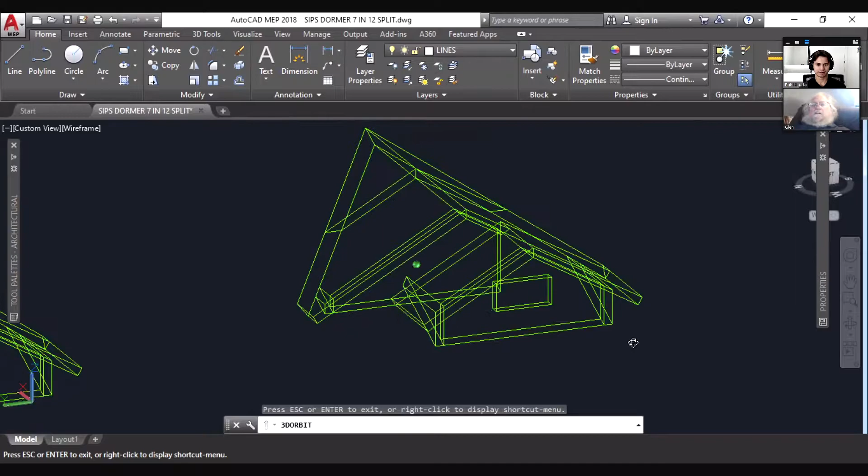Yeah, I like the split dormer. This one's interesting, and it's all done with SIPS panels. There's only 11 pieces to it.

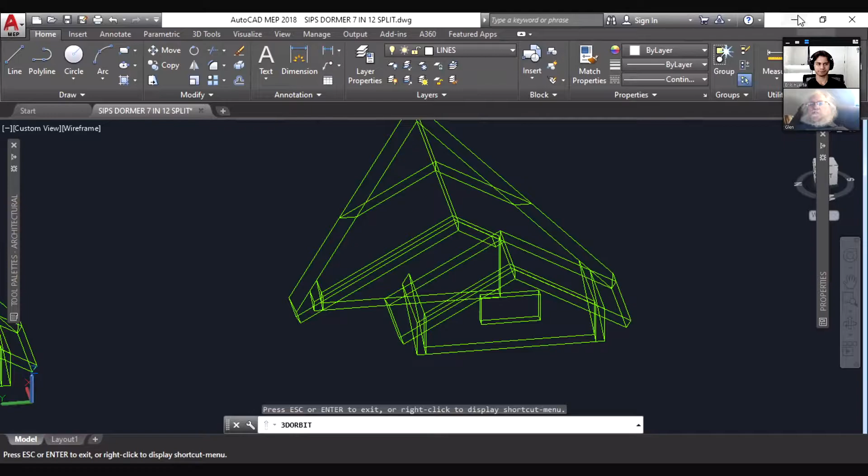You can see the various pieces. Let me show you a different view here, let me share a different screen. All right, so this is what it looks like, you can see how it stacks up there. It's not that big, only about an 8'8" or 8'9" span on this little one, and then the bigger span is slightly bigger.

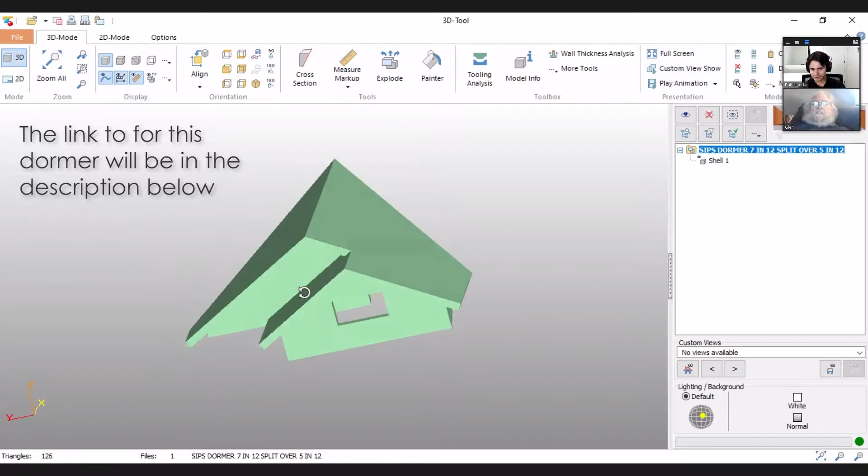So you said there's 7 pieces? I'm trying to count them real quick. No, there's 11 pieces, but a couple of them are pretty tiny, like this little piece here. A couple of these pieces are a really good size, to where you'd want more than one person to try to handle it.

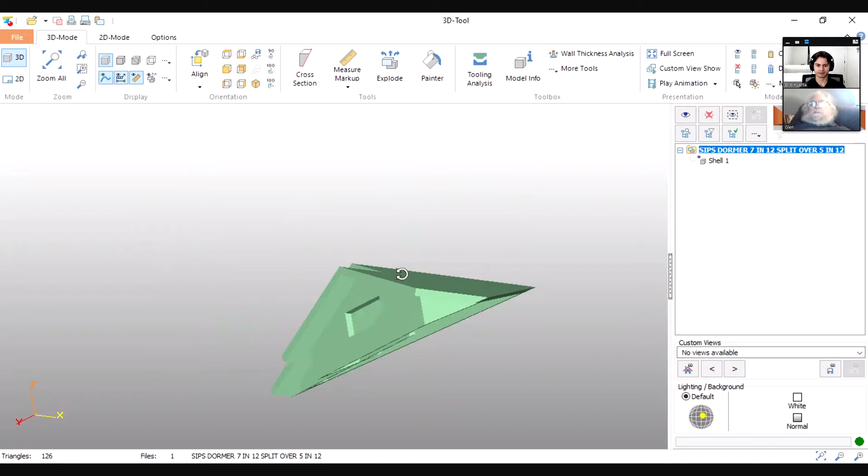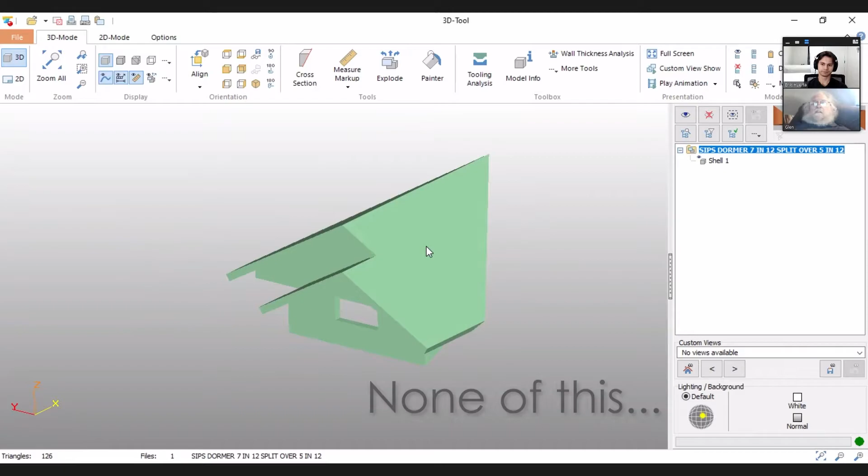But you can see how it's beveled to sit on the roof surface itself. The SIPS panel comes with this bevel already cut, so you don't have to do anything but set these up on the roof. So it takes away a lot of the work that would otherwise be required.

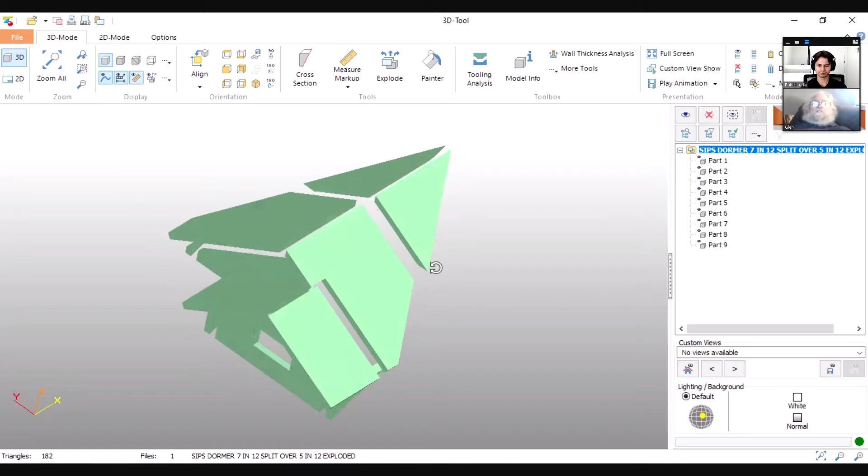Let me show you this other one here. Now, are you seeing this one? Yeah, there we go, I was waiting for that. All right, so now you can see, because it's exploded, you can see the different pieces. Yeah, so that's how it sets up. I just put a little distance between them, and now you can see how the different little pieces are.

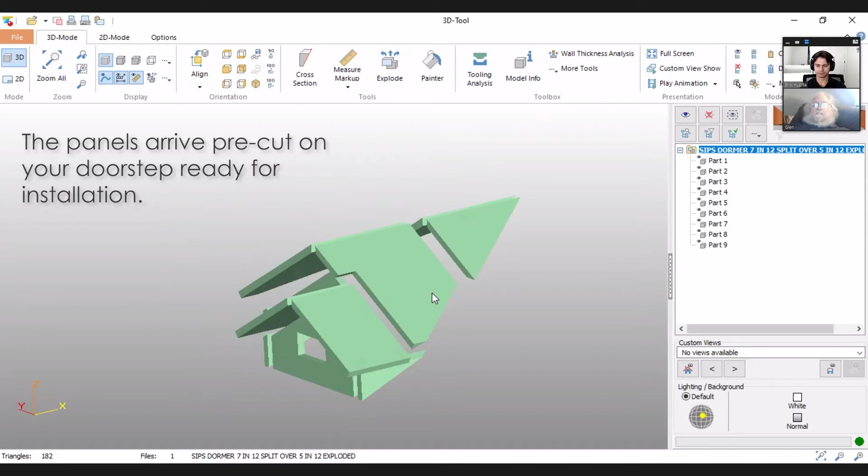So the company that makes the SIPS panels does these cuts for you, and you don't have to do anything but stick them together. Makes it a lot faster, speeds everything up, and it goes straight to the job.

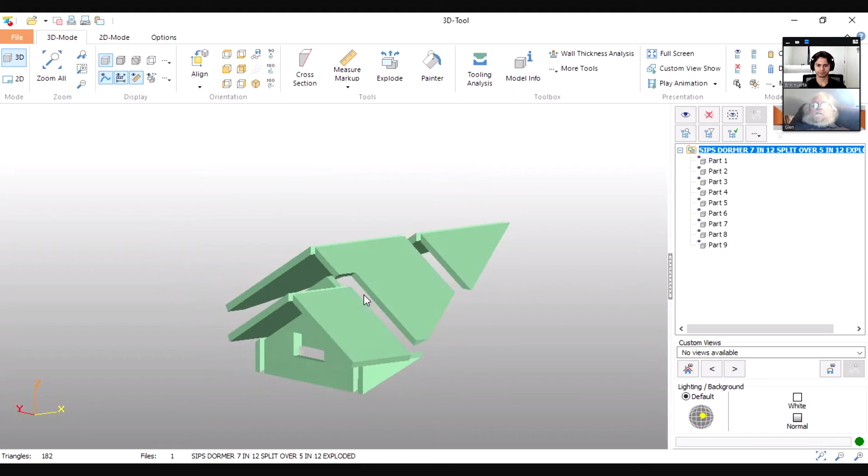There's going to be a delivery charge depending on where you live, but there's no lumber cost other than the siding that you put on it and the trim, depending on what you coat it with, plus the window or trim material, and the roofing material. Other than that, it goes up quick.